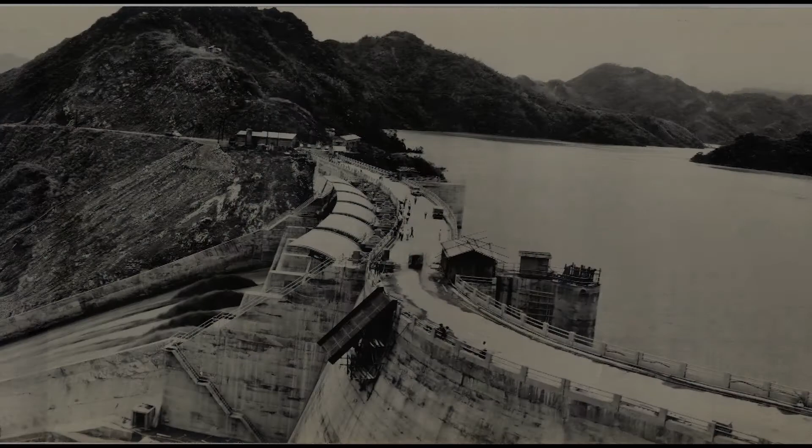Origin of the plan. The Shihmen Reservoir was completed in 1964 and has been in operation for more than 50 years. It's the key water supply facility for the northern parts of Taiwan.

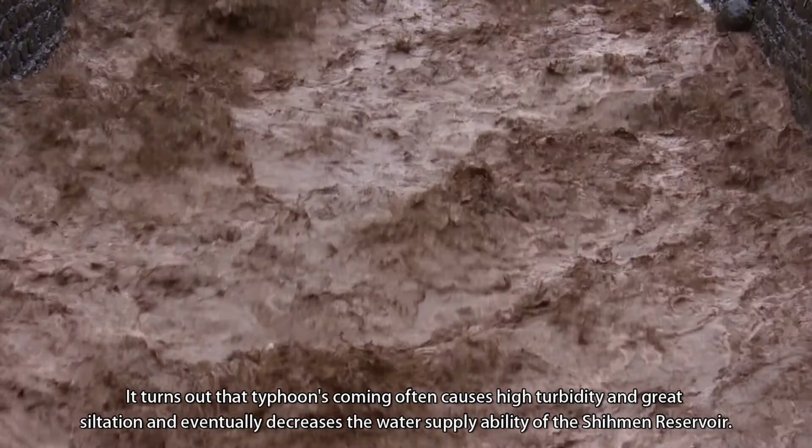The steep terrain and fragile geological formations of the Shihmen Reservoir catchment are hard to resist typhoons and tend to release debris. It turns out that typhoons often cause high turbidity and great siltation, and eventually decrease the water supply ability of the Shihmen Reservoir.

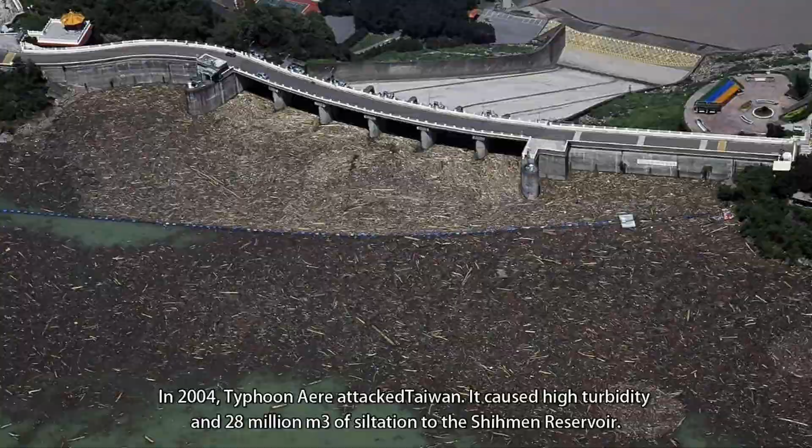In 2004, Typhoon Aere attacked Taiwan. It caused high turbidity and 28 million cubic meters of siltation to the Shihmen Reservoir. We had no choice but to stop the water supply for 18 days.

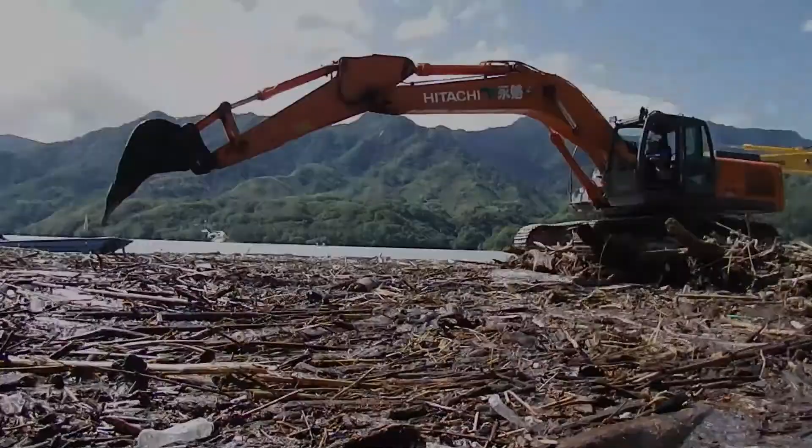To save the Shihmen Reservoir, our government has been working on the plan, improvement of the Shihmen Reservoir and its water catchment area, since 2006. In addition to conserving the upstream catchment and improving the downstream tap water system, the Shihmen Reservoir has been under great reformations, including the hydraulic desilting tube modified from the power generation tube, multi-level intake, and Zhongzhuang Lake, etc.

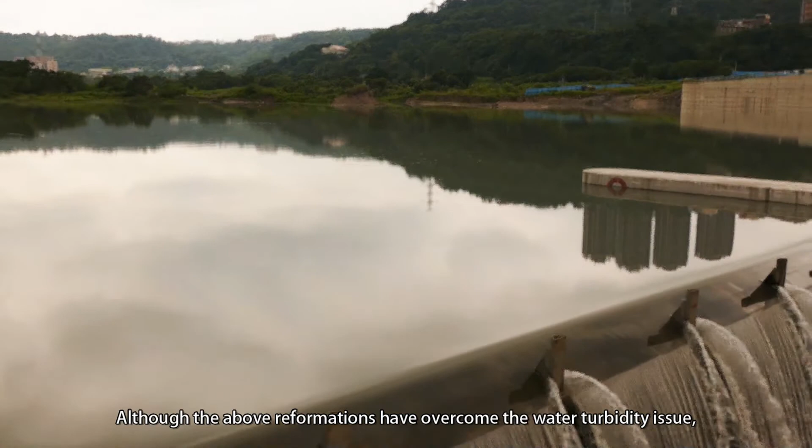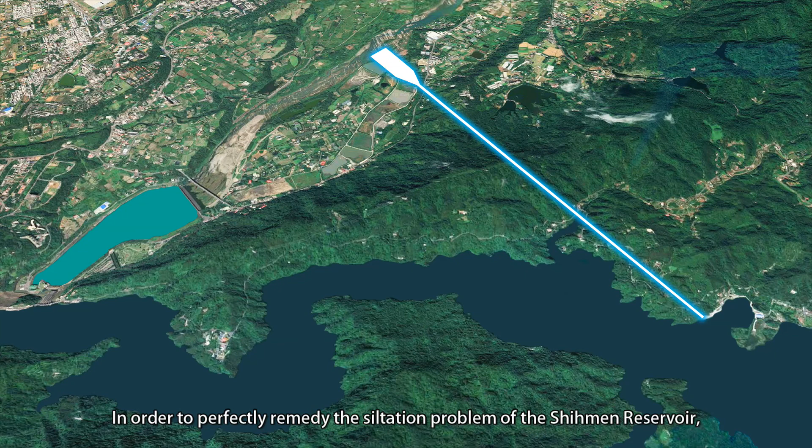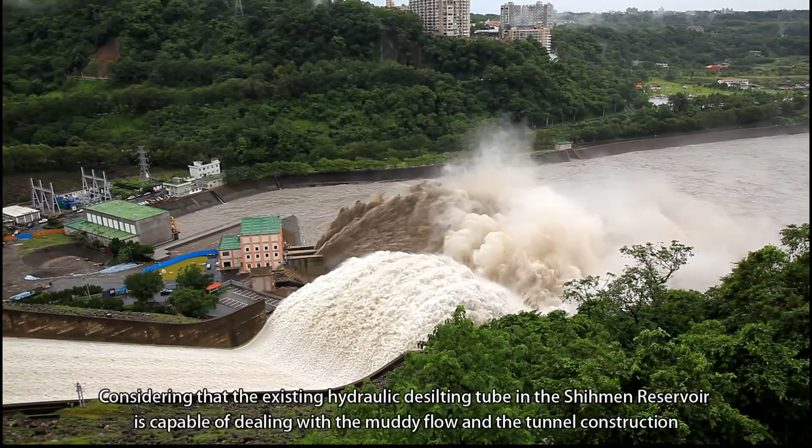Although the above reformations have overcome the water turbidity issue, they are not suitable for the siltation issue. In order to perfectly remedy the siltation problem of the Shihmen Reservoir, the authorities have planned two desilting tunnels, Amuping Desilting Tunnel and Dawanping Desilting Tunnel.

Considering that the existing hydraulic desilting tube in the Shihmen Reservoir is capable of dealing with the muddy flow and the tunnel construction may have side effects on the reservoir operation, our government decided to construct Amuping Desilting Tunnel first. The Amuping Desilting Plan was approved by the Executive Yuan in September of 2014, with a total construction budget of 4.6 billion NT dollars.

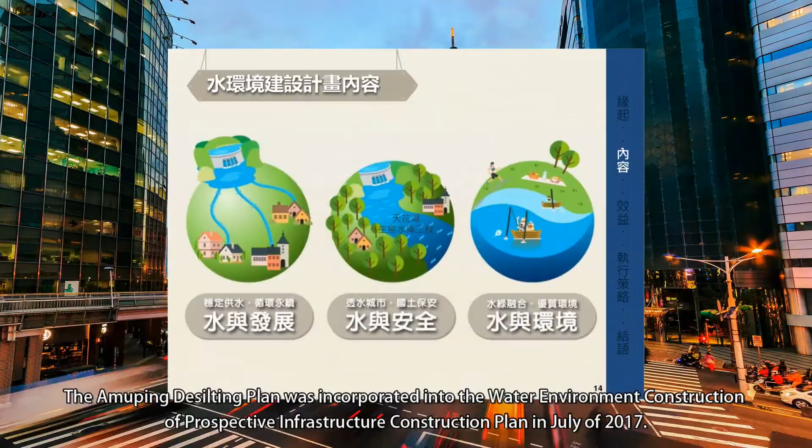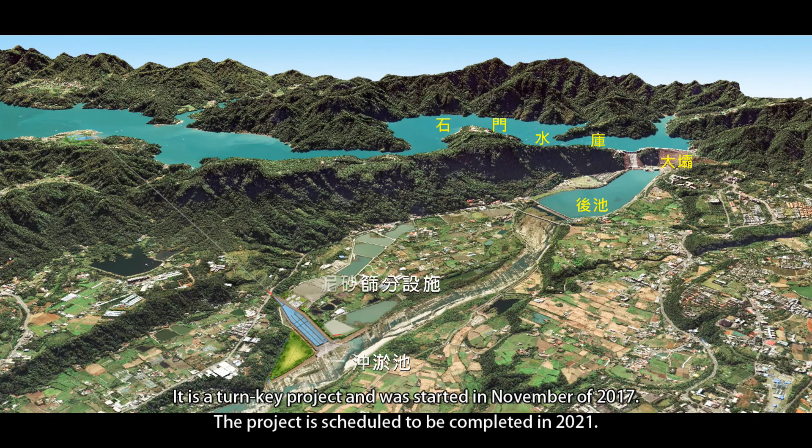The Amuping Desilting Plan was incorporated into the Water Environment Construction of the Prospective Infrastructure Construction Plan in July of 2017. The budget of Amuping Desilting Tunnel is 3.7 billion NT dollars. It is a turnkey project and was started in November of 2017. The project is scheduled to be completed in 2021.

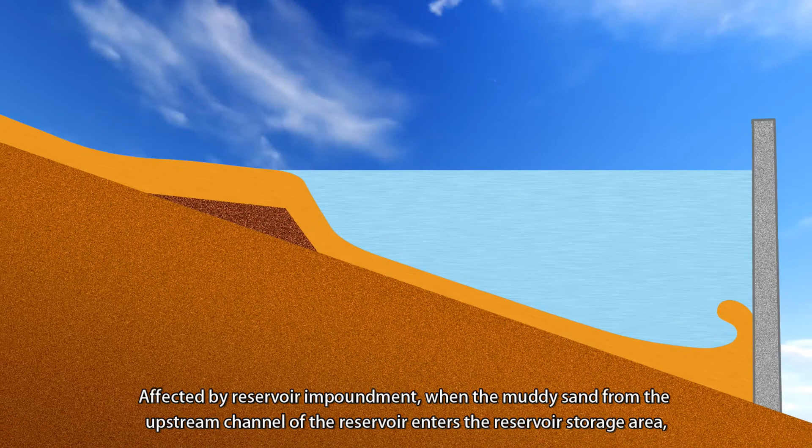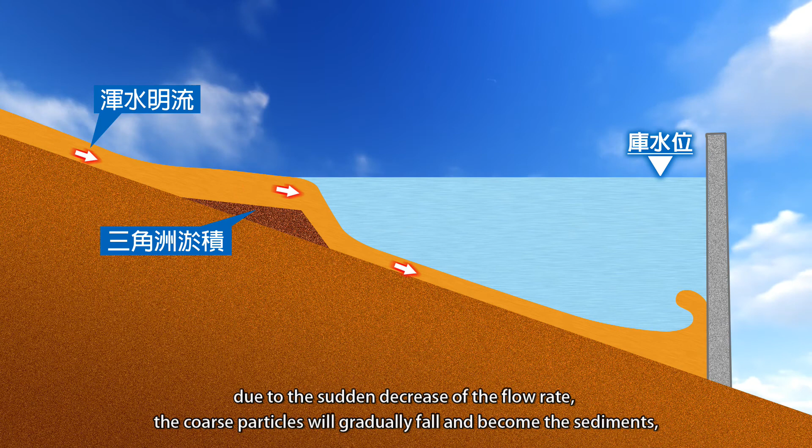Design concept. Amuping Desilting Tunnel and Dawanping Desilting Tunnel are designed for different silt transport characters. Affected by reservoir impoundment, when the muddy sand from the upstream channel enters the reservoir storage area, due to the sudden decrease of flow rate, the coarse particles will gradually fall and become sediments, and the fine particles will form the density current and sneak into the bottom of the reservoir to continue to flow downward.

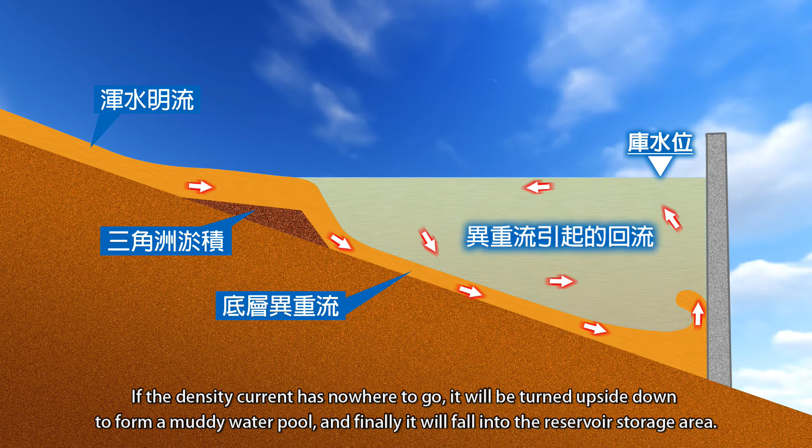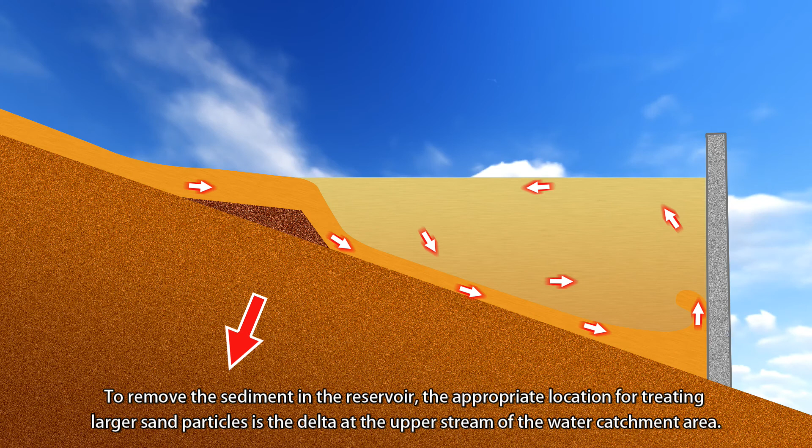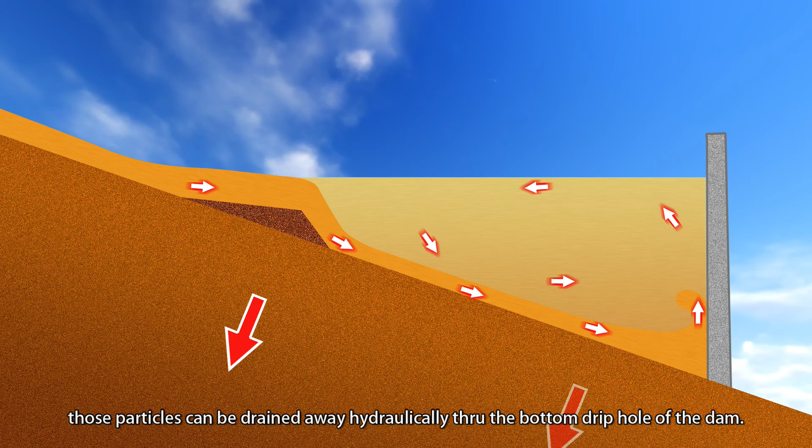If the density current has nowhere to go, it will be turned upside down to form a muddy water pool, and finally it will fall into the reservoir storage area. To remove the sediment in the reservoir, the appropriate location for treating larger sand particles is the delta at the upper stream of the water catchment area. As for the density current of extremely fine sand particles, those particles can be drained away hydraulically through the bottom drip hole of the dam.

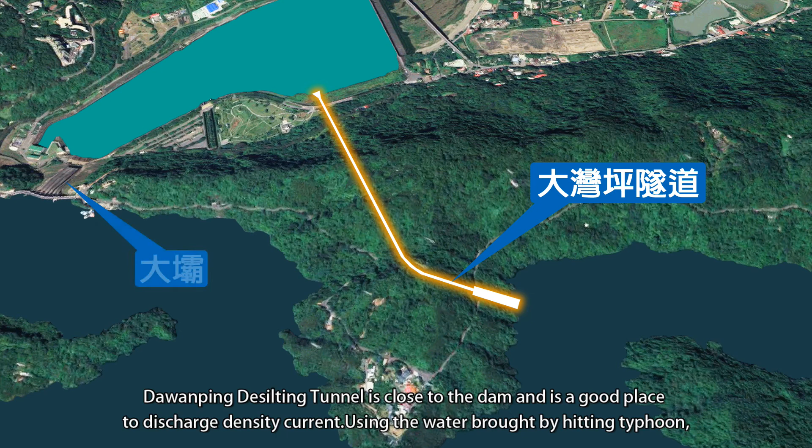Dawanping Desilting Tunnel is close to the dam and is a good place to discharge density current. Using the water brought by typhoons to carry out hydraulic dredging, the tunnel can reduce the accumulation of fine particles and prevent the formation of muddy water that affects the water supply. But it can only be used during typhoons and flood seasons. In addition, the sediment that has fallen to the bottom of the catchment will not be taken away.

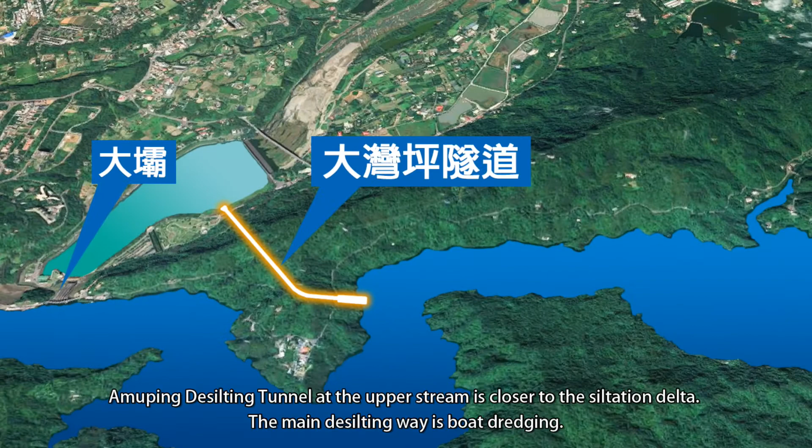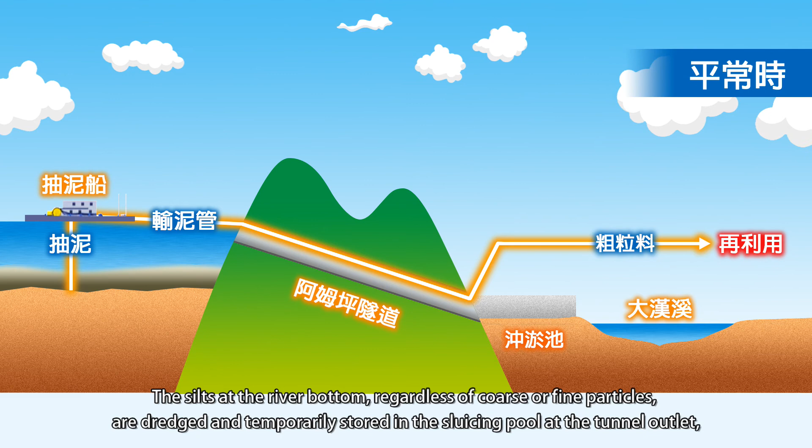Amuping Desilting Tunnel at the upper stream is closer to the siltation delta. The main desilting way is boat dredging. The silts at the river bottom, regardless of coarse or fine particles, are dredged and temporarily stored in the sluicing pool at the tunnel outlet, which will be flooded away during the typhoon season. The functions of the Amuping Desilting Tunnel and Dawanping Desilting Tunnel complement each other.

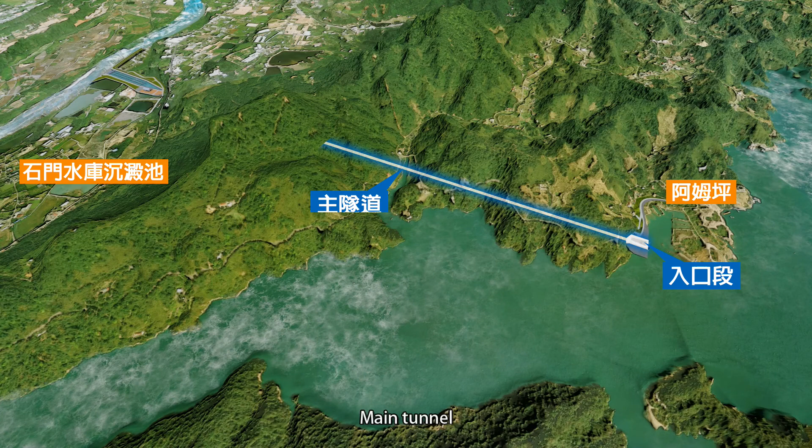Construction works. There are four major portions in Amuping Desilting Tunnel construction: intake, main tunnel, outlet and sluicing pool, and silt classification, total 4 facilities. 1. Intake.

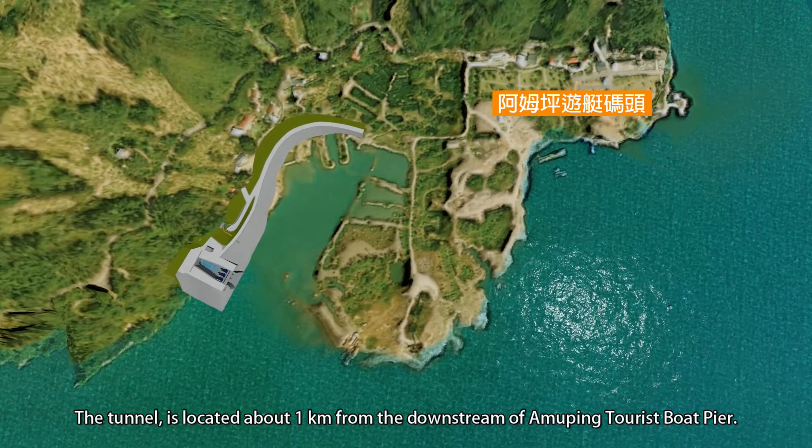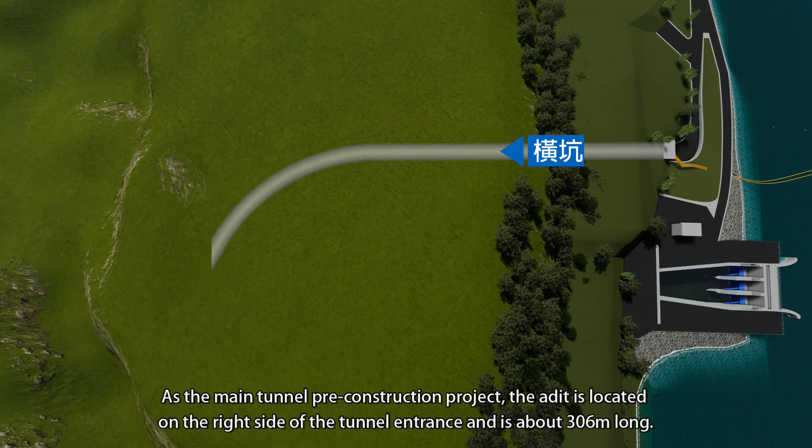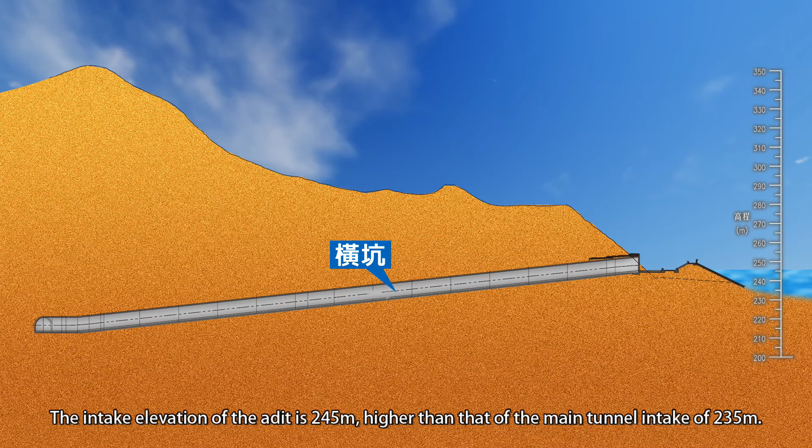The tunnel is located about 1 kilometer downstream of Amuping Tourist Boat Pier, including adit, water intake, tunnel entrance, etc. As the main tunnel pre-construction project, the adit is located on the right side of the tunnel entrance and is about 306 meters long. It is the earliest construction of the main tunnel. The intake elevation of the adit is 245 meters, higher than that of the main tunnel intake of 235 meters.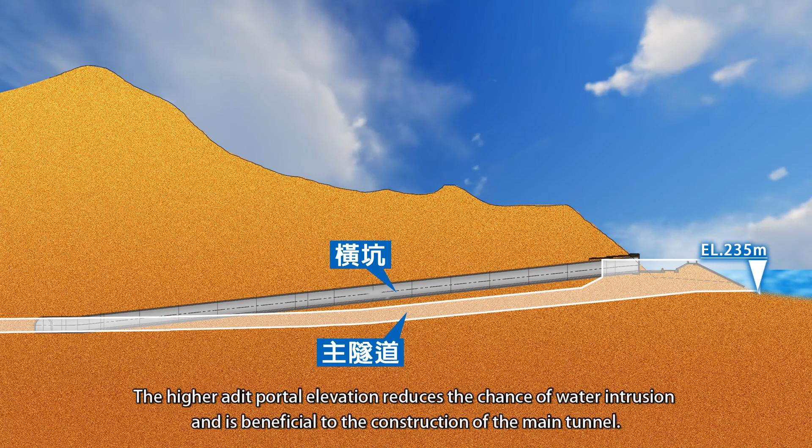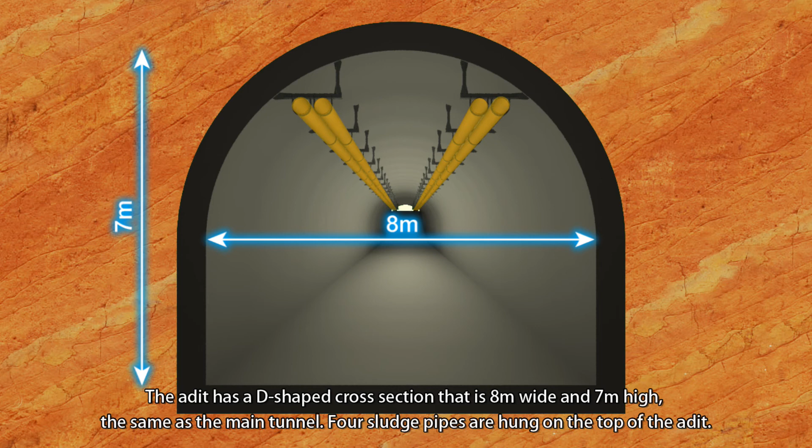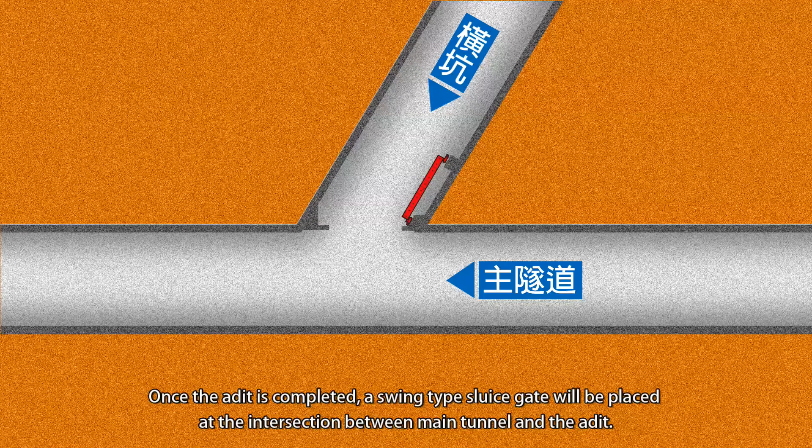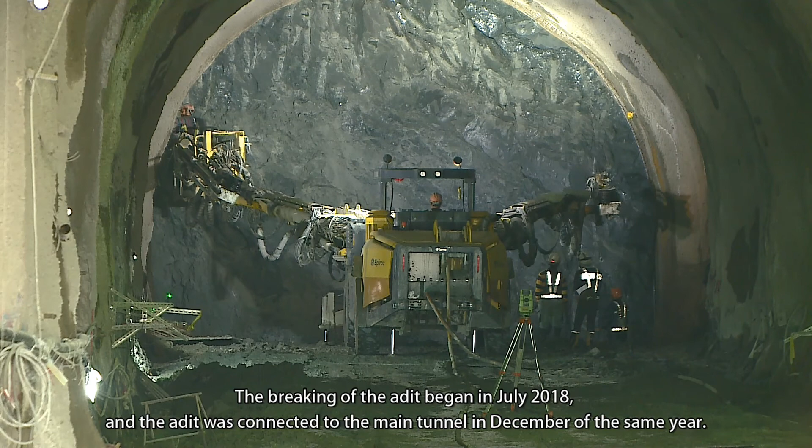The higher adit portal elevation reduces the chance of water intrusion and is beneficial to the construction of the main tunnel. The adit has a D-shaped cross-section that is 8 meters wide and 7 meters high, the same as the main tunnel. 4 sludge pipes are hung on the top of the adit. Once the adit is completed, a swing-type sluice gate will be placed at the intersection between the main tunnel and the adit. The gate is normally closed to prevent water from flowing into the adit. The breaking of the adit began in July 2018, and the adit was connected to the main tunnel in December of the same year.

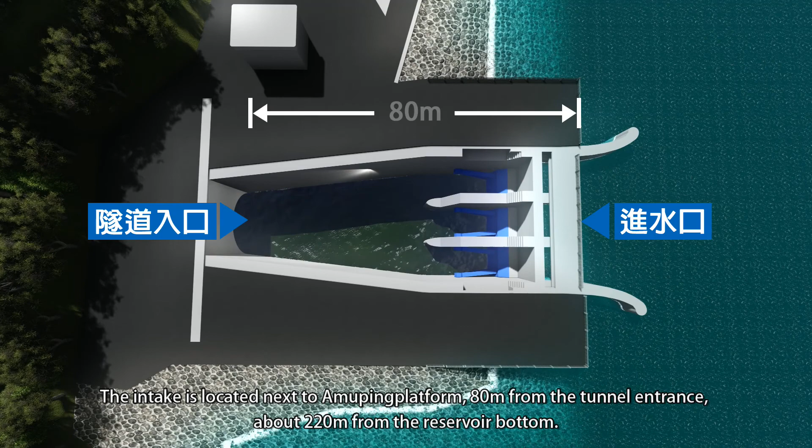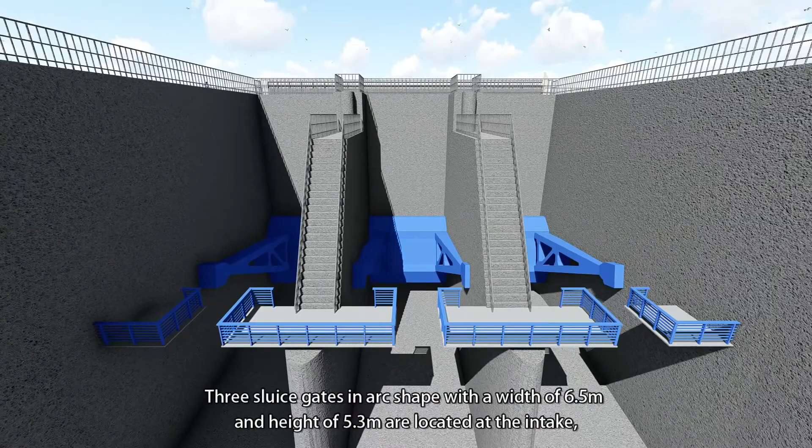The intake is located next to Amuping platform, 80 meters from the tunnel entrance, about 220 meters from the reservoir bottom. The intake is a sluice gate controlled spillage weir with an elevation of 235 meters. The elevation of the tunnel entrance is 230 meters. 3 sluice gates in arc shape with a width of 6.5 meters and height of 5.3 meters are located at the intake, which are often closed and will be opened for desilting or flood discharge during typhoon and flooding season.

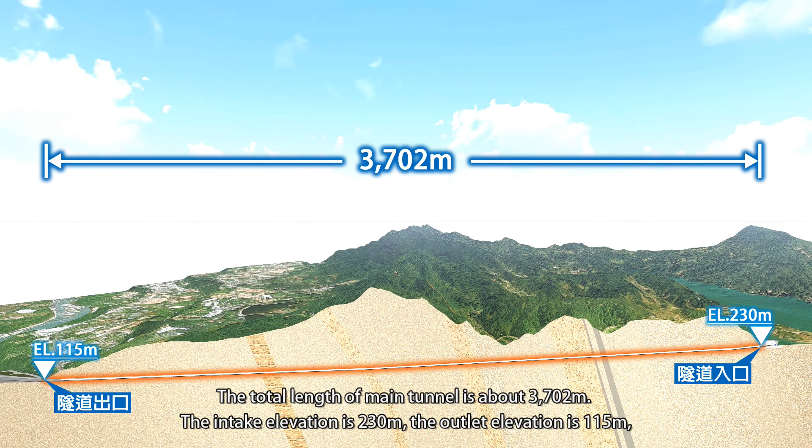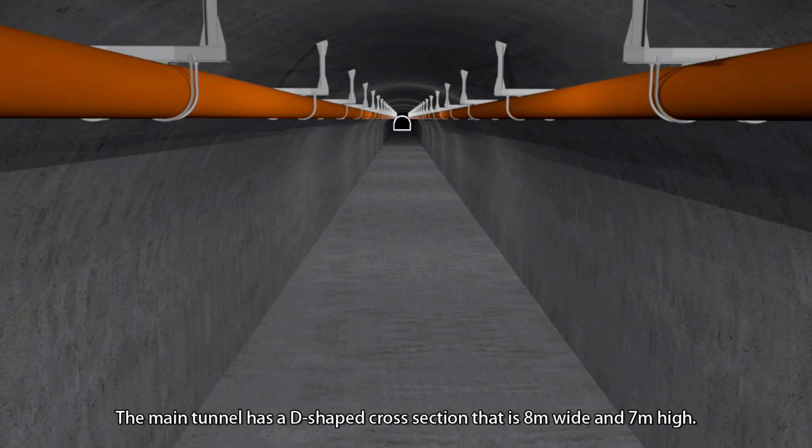2. Main tunnel. The total length of main tunnel is about 3,702 meters. The intake elevation is 230 meters. The outlet elevation is 115 meters. The slope is about 1 of 32, and the design flow volume is 600 cubic meters per second. The main tunnel has a D-shaped cross-section that is 8 meters wide and 7 meters high.

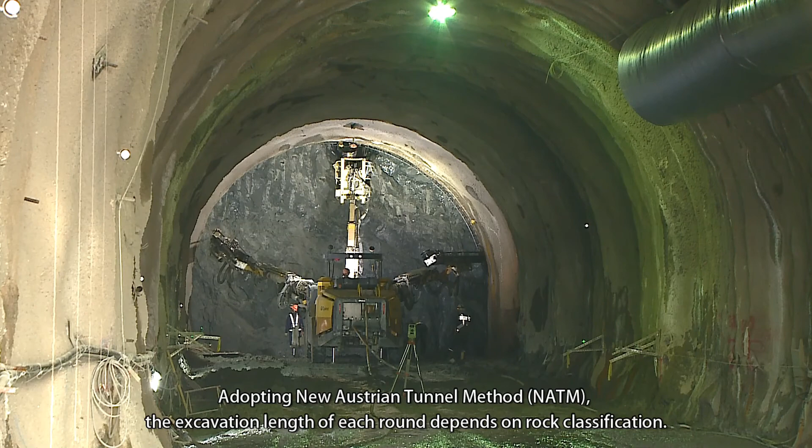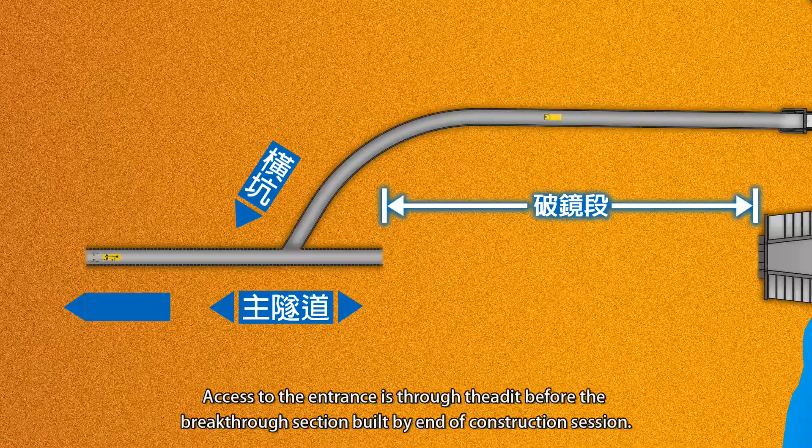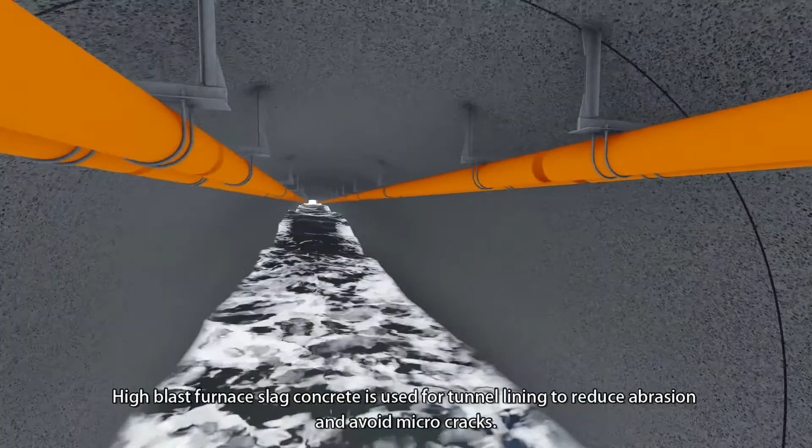A total of 4 sludge pipes are set on the roof of the main tunnel from the connecting of the adit. Adopting new Austrian tunnel method, NATM, the excavation length of each round depends on rock classification. The tunnel is to be built from both ends toward the center. Access to the entrance is through the adit before the breakthrough section, built by end of construction session. When a flood is discharged in the main tunnel, the maximum flow speed reaches 20 meters per second. High blast furnace slag concrete is used for tunnel lining to reduce abrasion and avoid micro cracks.

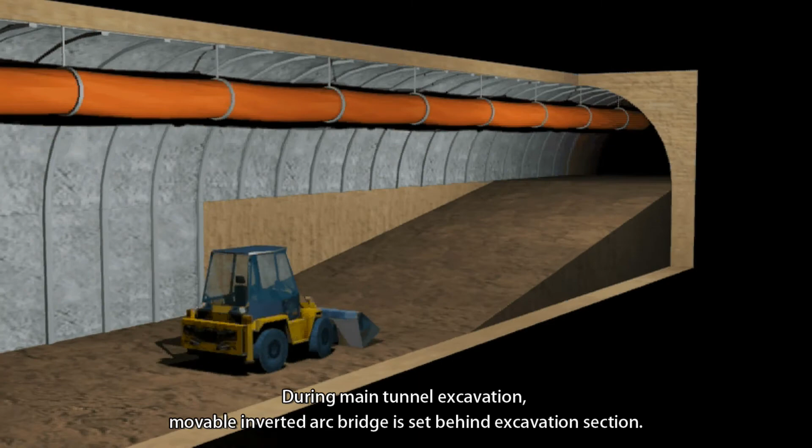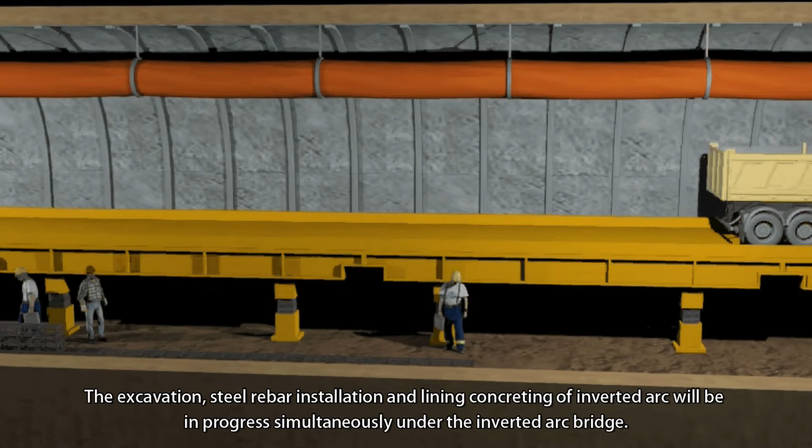During main tunnel excavation, movable inverted arc bridge is set behind excavation section. The excavation, steel rebar installation and lining concreting of inverted arc will be in progress simultaneously under the inverted arc bridge. Tunnel is to be lined with movable steel forming behind inverted arc works. Various construction works can be in progress simultaneously, without affecting construction vehicles moving in and out. The construction duration can thus be reduced.

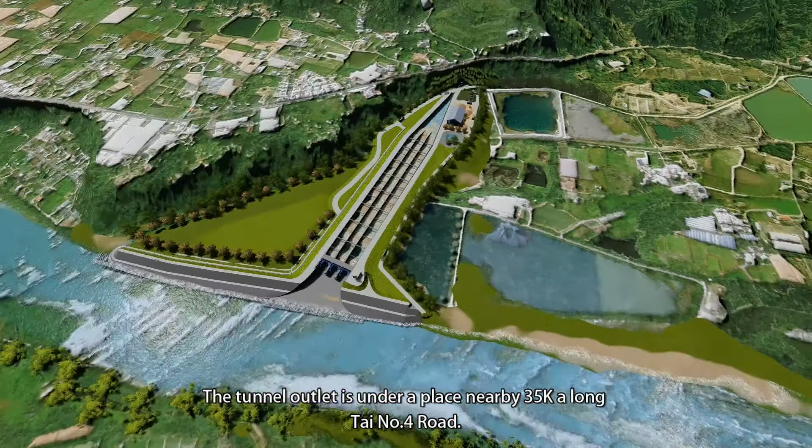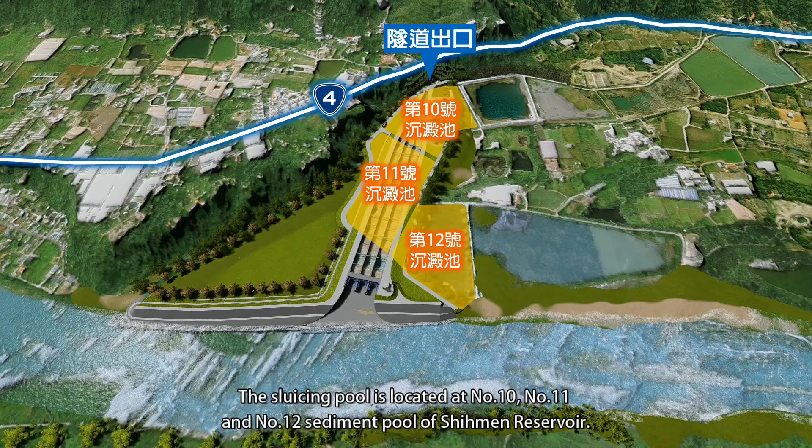3. Outlet and sluicing pool. The tunnel outlet is under a place nearby 35K along Tai No. 4 road. The sluicing pool is located at No. 10, No. 11, and No. 12 sediment pool of the Shihmen Reservoir. This section covers outlet, sluicing pool, etc.

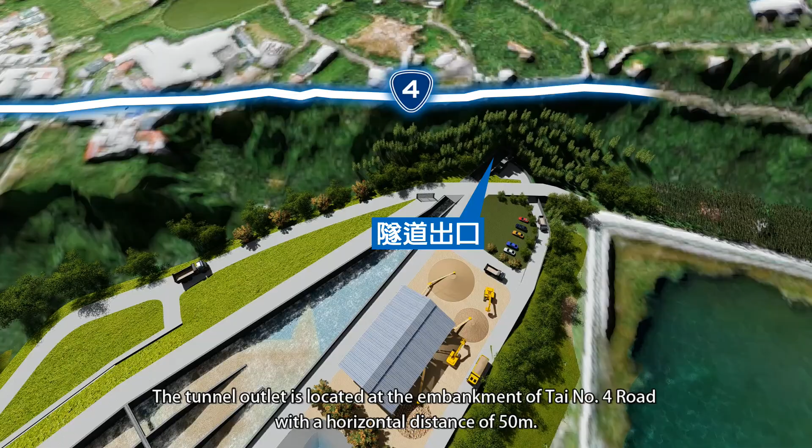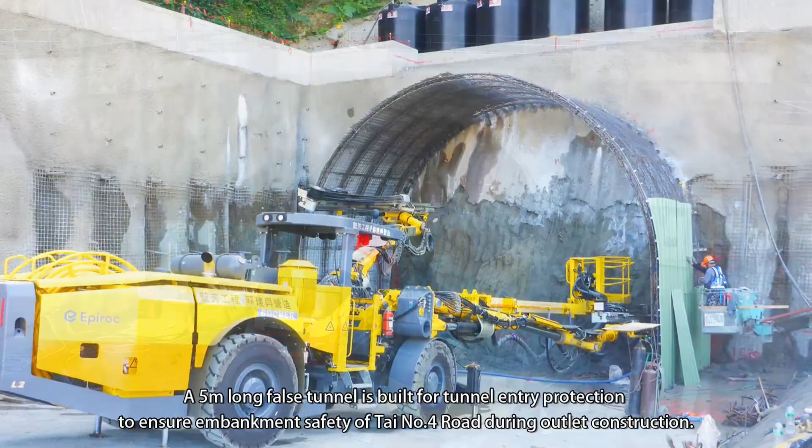The tunnel outlet is located at the embankment of Tai No. 4 road with a horizontal distance of 50 meters. 33 retaining group piles with 1.5 meter diameter are driven for embankment excavation. A 5-meter-long false tunnel is built for tunnel entry protection to ensure embankment safety of Tai No. 4 road during outlet construction.

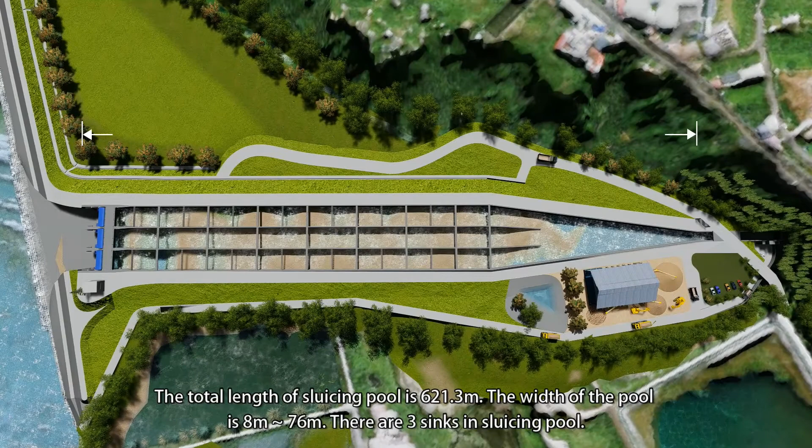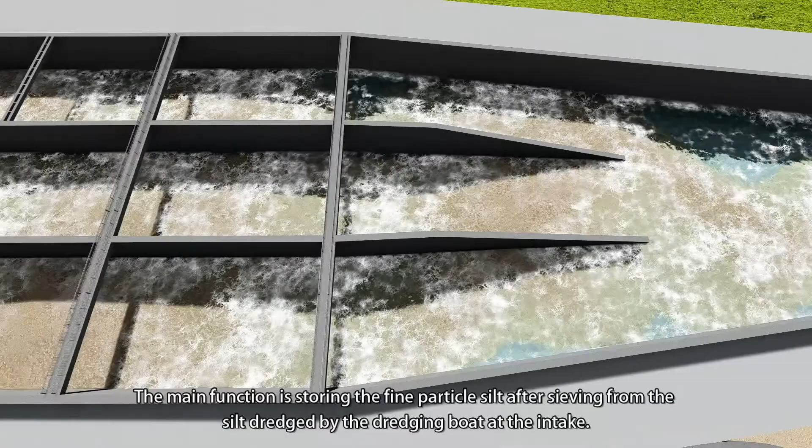The total length of sluicing pool is 621.3 meters. The width of the pool is 8 meters to 76 meters. There are 3 sinks in sluicing pool. The main function is storing the fine particle silt after sieving from the silt dredged by the dredging boat at the intake. The stored silt is to be flooded into sea via Dahan River in typhoon season.

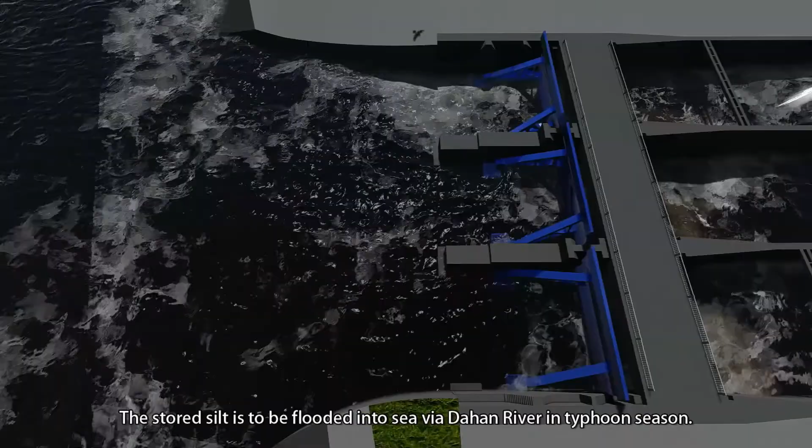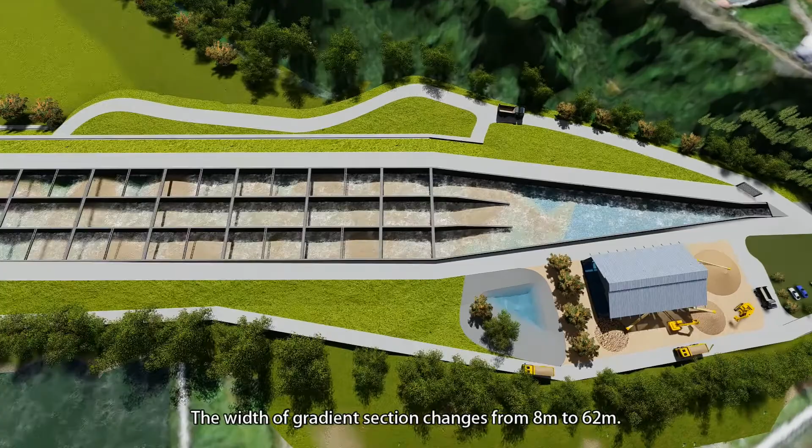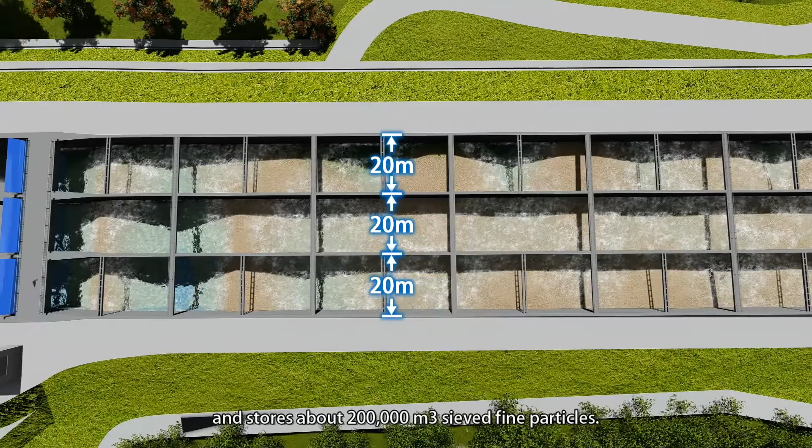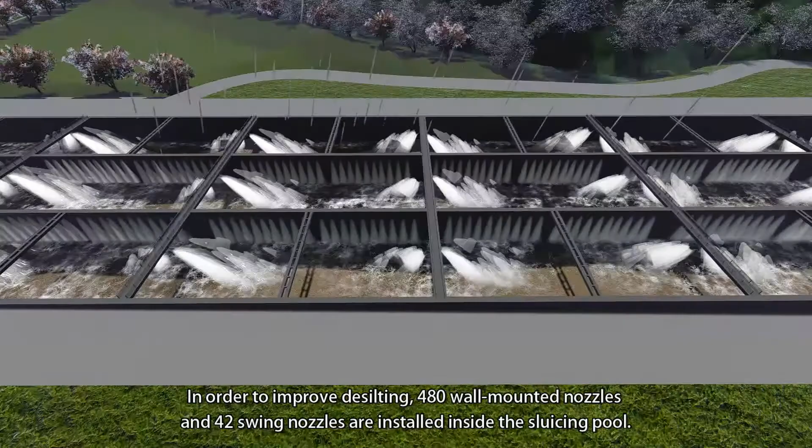Sluicing pool is composed of gradient section, pool section, and sluice gate pier section. The width of gradient section changes from 8 meters to 62 meters. Pool section is composed of 3 rectangular flow channels with a width of 20 meters and stores about 200,000 cubic meters sieved fine particles. In order to improve desilting, 480 wall-mounted nozzles and 42 swing nozzles are installed inside the sluicing pool. Sluice gate pier is the last section of sluicing pool.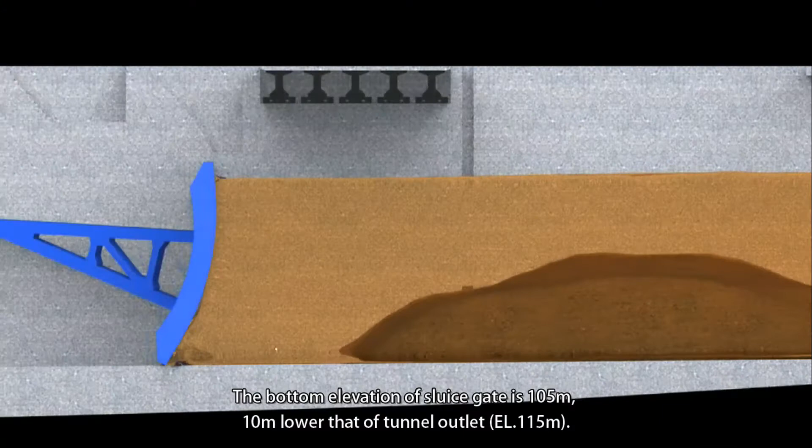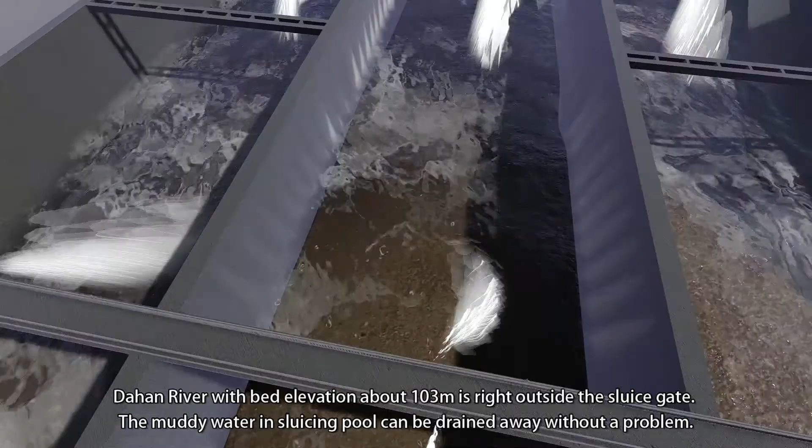3 arc-shaped sluice gates with a width of 18 meters are installed. This width is the largest one among all sluice gates in Taiwan. The bottom elevation of sluice gate is 105 meters, 10 meters lower than that of tunnel outlet, EL 115 meters. Dahan River with bed elevation about 103 meters is right outside the sluice gate. The muddy water in sluicing pool can be drained away without a problem.

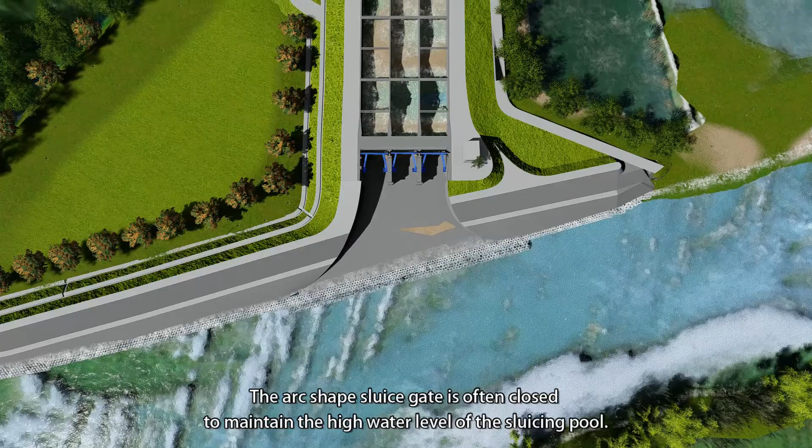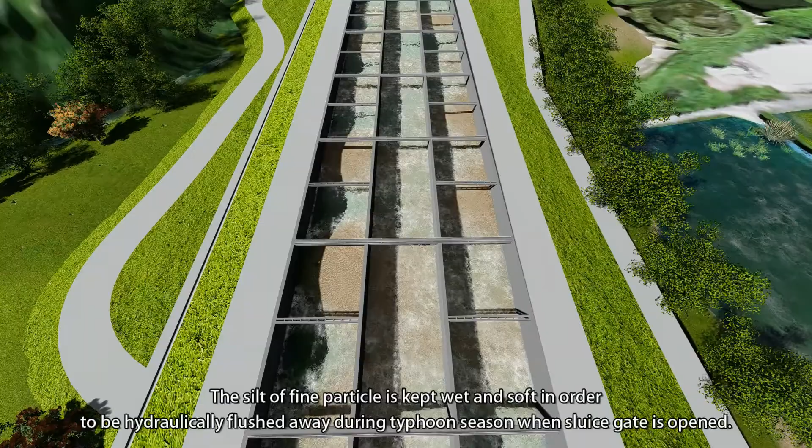The arc-shaped sluice gate is often closed to maintain the high water level of the sluicing pool. The silt of fine particles is kept wet and soft in order to be hydraulically flushed away during typhoon season when sluice gate is opened.

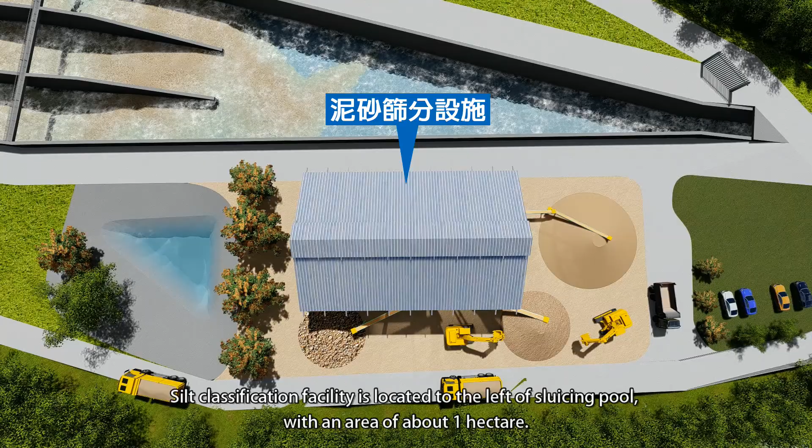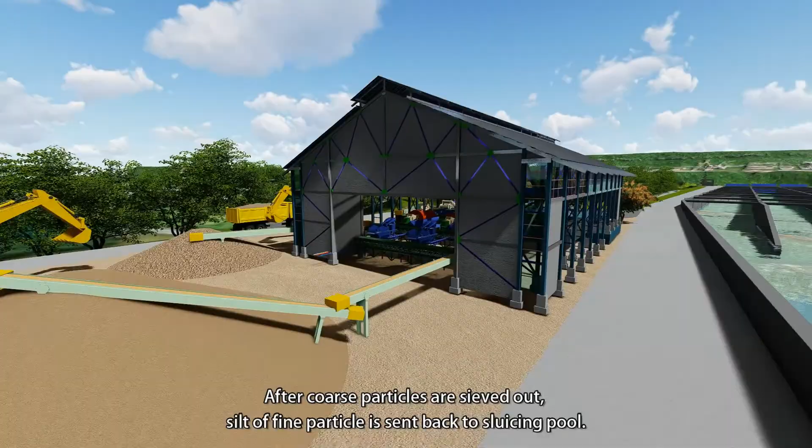4. Silt Classification Facility. Silt Classification Facility is located to the left of sluicing pool, with an area of about 1 hectare. The silt dredged by dredging boats at tunnel intake is transported through sludge pipes to Silt Classification Facility. After coarse particles are sieved out, silt of fine particle is sent back to sluicing pool.

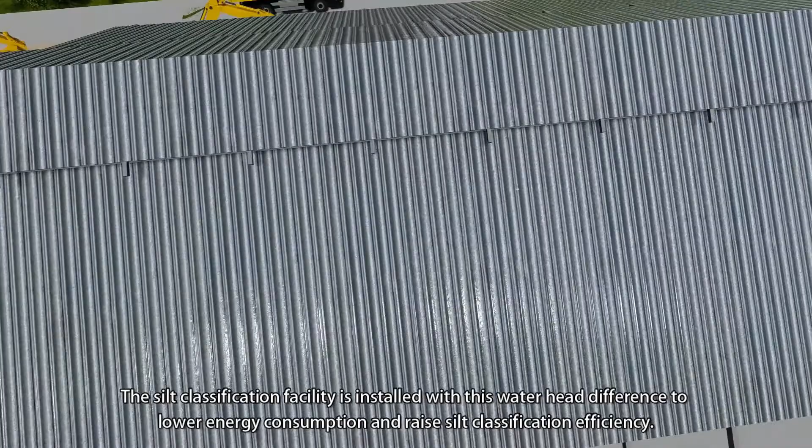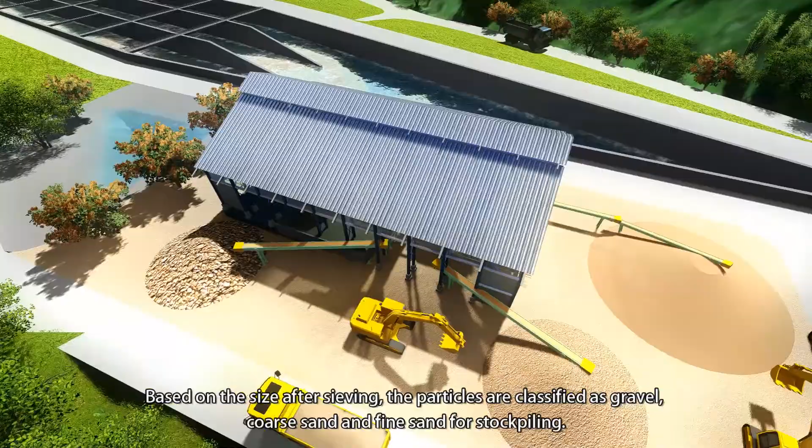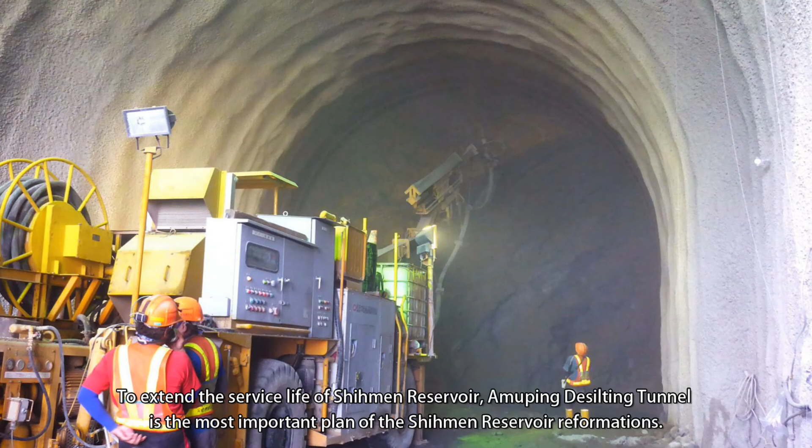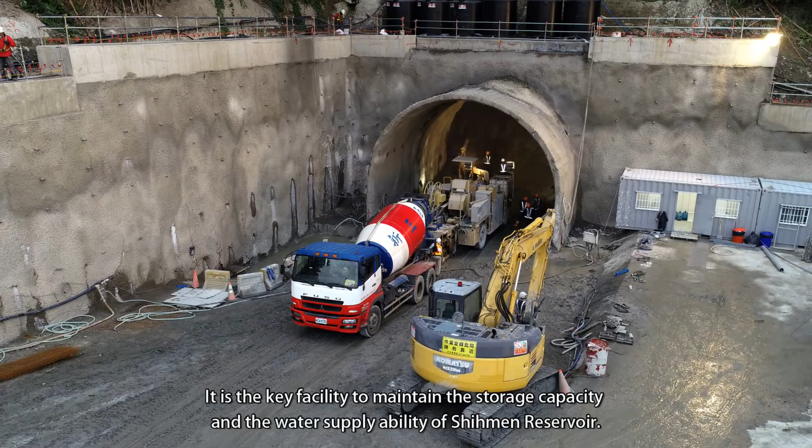Conclusion. To extend the service life of Shihmen Reservoir, Amuping Desilting Tunnel is the most important plan of the Shihmen Reservoir reformations. It is the key facility to maintain the storage capacity and the water supply ability of Shihmen Reservoir. The tunnel has distinctive functions of reservoir siltation reduction, soil and sand resource recycle, and flood prevention.

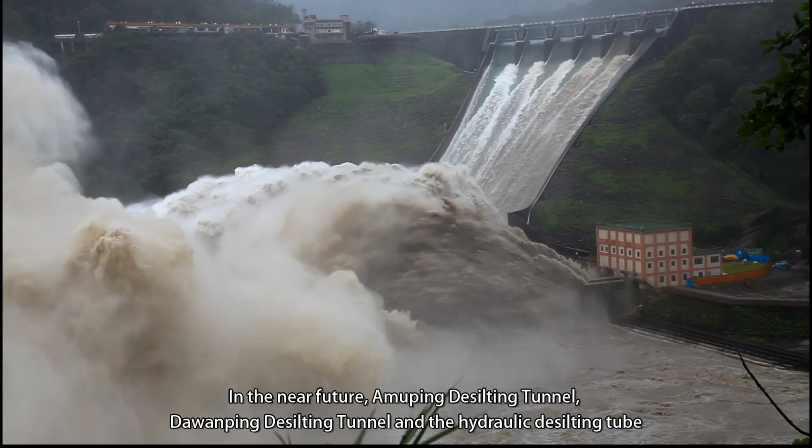In the near future, Amuping Desilting Tunnel, Dawanping Desilting Tunnel, and the hydraulic desilting tube, modified by power generation tube, will work together to deal with the siltation issue of the Shihmen Reservoir.